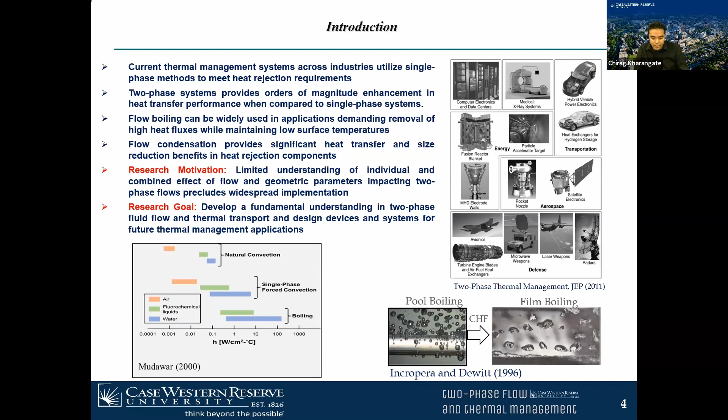So in this talk, I have three basic, main focus areas, which I just talked about in the introduction. I'm going to divide it into flow boiling fundamentals in terms of what fundamental work we're doing in flow boiling. I'm going to start with experimental work, follow that up with theoretical modeling, where I'll focus on one parameter, critical heat flux. And then I'll go into autonomous vision, where I'll focus on, or at least talk about, heat transfer coefficient.

I'm going to follow that up with the flow condensation section, where I'll again talk about experiments, followed by some computational fluid dynamics simulations and data science modeling. In data science modeling, it's more data consolidation and modeling, as well as connection to physics-informed stuff that we plan to do in the future.

Before I conclude the talk, I'll have a short section on different applications of boiling and condensation, just to see the scope to which these fundamental research questions can address actual applications. We work on vapor chambers, we work on electronic devices, say high heat flux device fabrication and different materials. We have applications in NASA. A lot of my projects come from NASA, where we are interested in cryogenic fluid management, condenser systems, heat exchanger systems.

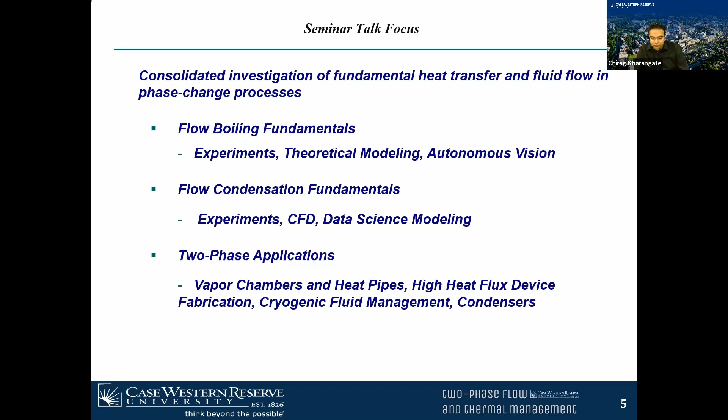In my lab, we work on a lot of questions which come from different industries, as well as the government, including NASA. NASA is a main focus area in my research group, and one thing where we can contribute is understanding the effect of gravity.

In the flow boiling section, as well as in the flow condensation section, in the experimental part, I'll talk about how gravity affects flow boiling behavior. Something we all understand, but what we see terrestrially can be significantly different in microgravity. What we see terrestrially between different orientations can have a significant impact on both heat transfer and critical heat flux. I'll also try to talk about how we can use interfacial instability behavior to predict performance parameters.

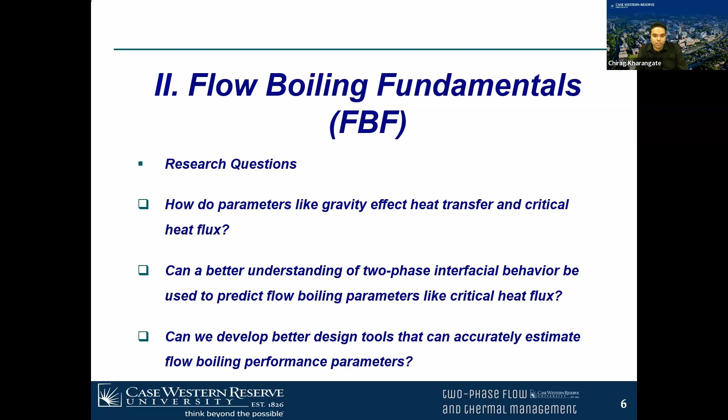As I said, I'll focus on critical heat flux for that section. I'll also go into some work we're doing with autonomous vision in collaboration with UC Irvine, trying to find out how we can better predict, say, heat transfer coefficient.

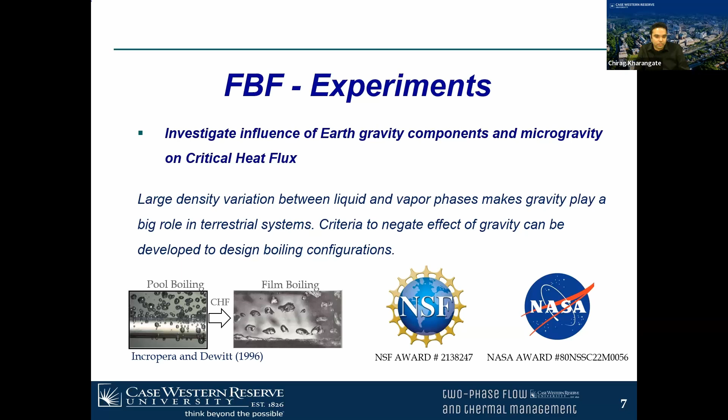With our experiments, I'm going to focus on the influence of Earth's gravity on critical heat flux. I won't go into heat transfer results here, but we do have them, and I can always share those with you if you were to email me.

So we have this flow conditioning loop in our lab. This is supported right now by NASA as well as an Office of Naval Research project. It's a simple two-phase flow conditioning loop that uses NPFH or FC72 as the working fluid.

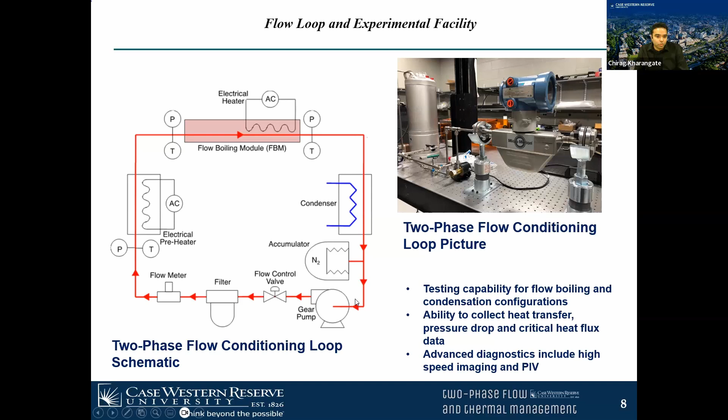It has common components like the gear pump, flow meter, and preheater to provide the required inlet subcooling for the flow boiling module in this situation. Within the flow boiling module, we have two-phase flow basically being generated, and then there's a condenser. It's able to support not only our boiling experiments, as I'll show, but also our condensation experiments.

Our flow boiling module, this one specifically, is designed for capturing flow visualization data in addition to data acquisition for heat transfer and pressure drop. This is showing you, in the figure on top, a sandwiched configuration with two aluminum support plates compressing three layers of transparent plastic between them.

The end result is this cross section, which gives us a flow channel 2.5 millimeters wide by 5 millimeters in height. We have enough length for flow development, and then in the heated section, we have the capability to heat the top and bottom walls individually or simultaneously to provide heating and initiate boiling. The side walls, as I said, are transparent, allowing us to visualize the flow.

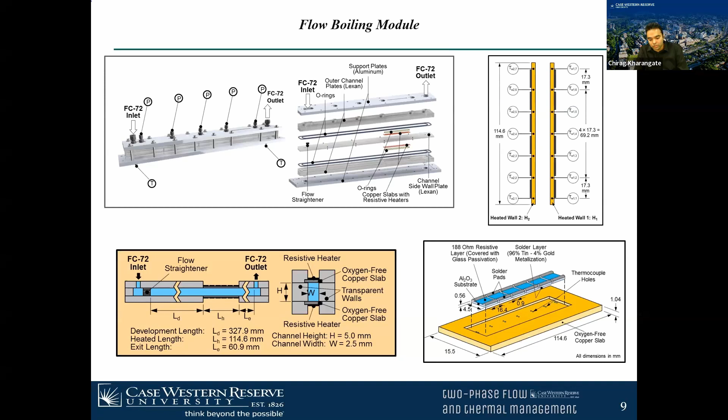We have temperature measurements as well as resistors placed in such a way that we can provide almost uniform heat flux along this heater channel.

I'd like to go into some of this simple configuration data as I show my experimental work, comparing a horizontal flow configuration situation where we have three different types of heating for the same setup that I just showed you.

If we have a top-only wall heating configuration, this is all in Earth's gravity, you would have vapor accumulating at the wall. If you have a bottom wall heating configuration, with the flow and the waviness it generates, vapor leaves the bottom wall, allowing liquid to come back and wet the wall. In a double-sided configuration, if we simultaneously heat both walls, you get more of a combined behavior. This is expected, at least for lower flow rates where inertia is not dominant and gravity is.

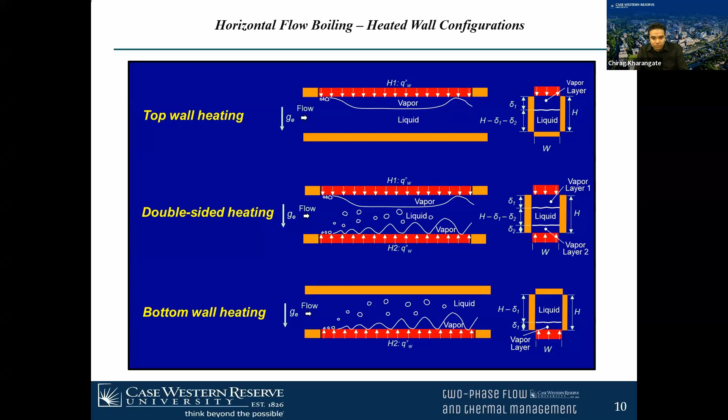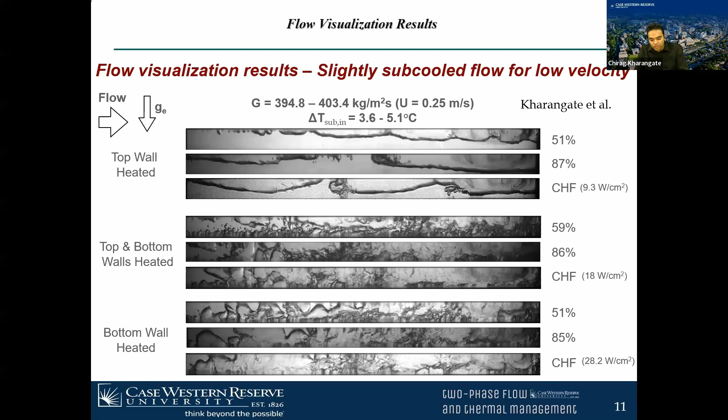So now if we just move to a higher velocity, these velocities are important to us in some of the work that we do with NASA, because if we were to get configurations where inertia starts to dominate gravity, a system that works at 1g, like top wall heating, would also work well in 0g, at least as a starting point. That's how we design some of our experiments for these space systems.

In this situation, we have 4 times the velocity, almost 1 meter per second compared to the last one. And now the behavior is, as you can see, closer. Inertia is starting to become dominant. It's not exactly the same yet, but much closer than what we saw in the last configuration.

And in the double-sided heating wall configuration, it's more like larger shear, larger mixing. But overall, even the critical heat flux values are starting to converge. So these are some things that we use to study the behavior, look at how the interfaces and the phases are behaving as we perform these different heat transfer experiments.

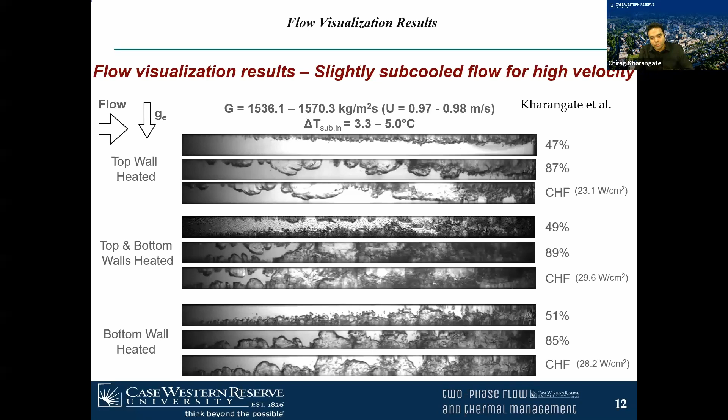So as we come close to the end of this section, I just want to say we perform these experiments for different inlet conditions, which can include high subcooling, low subcooling, and even two-phase inlet. In all of them, at some point, we can see critical heat flux values for all these configurations starting to converge. More or less, the point at which inertia starts to dominate is significantly impacted by what the inlet condition was.

But we are able to design systems where gravity no longer affects this important design parameter. More or less, these threshold velocities help us to design thermal systems for 0G as a first starting point.

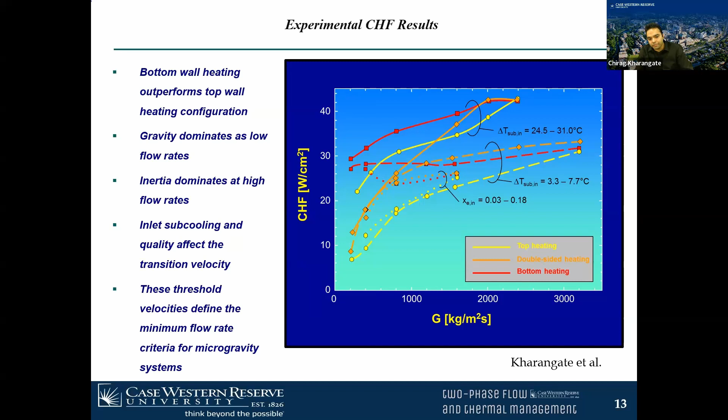So now I'll move, I have multiple sections, all of them related, but go into different aspects of it. Now I'm going to talk about modeling critical heat flux, basically a hydrodynamic instability model to predict critical heat flux. And we'll use the same behavior that we saw in our last slide.

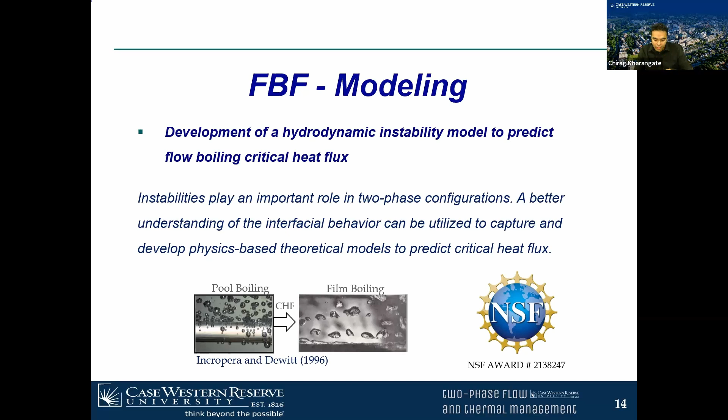For most cases, this was the behavior we saw. There was a vapor contact region, where we would expect mostly vapor being in touch with the wall, with intermediate sections where liquid would be wetting. So this is where most of our liquid access is coming in to prevent a phenomena like critical heat flux, basically due to departure from nucleate boiling, from happening.

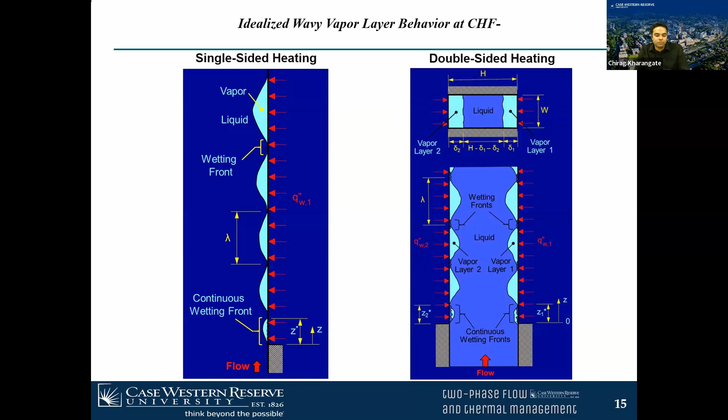So looking at that behavior from the images, we set up a combination of separated flow and interfacial instability. But like I said, what we do see in our imaging, when we see CHF, when we turn systems off, there is very little liquid access that we see at the wall.

So if this were to be a simple wall, before critical heat flux, there is wetting at the wall, and it can include vapor bubbles, but still liquid clearly being seen at the wall. After critical heat flux, we are saying that the liquid no longer hits the wall.

So this specific model that I'm going to talk about states that the CHF is triggered when liquid no longer has access to the wall, and liquid can have access in two directions. One direction is basically in the flow direction, so as new liquid comes in, it will have access to reach the wall. And if that access is cut, the liquid won't reach it.

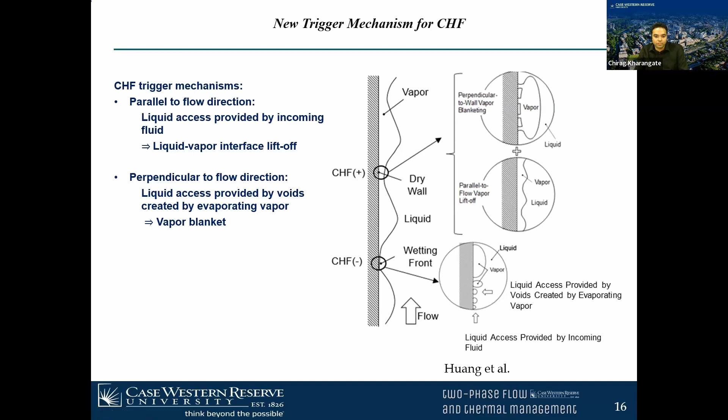And then in the perpendicular to the flow direction, again, as vapor bubbles are generated, the liquid re-wets the wall. As vapor comes out, it comes back to the wall, and that is another access point. So CHF, according to the model, is triggered when both these accesses are cut.

So the first part of it, we do instability analysis. Let's just consider a simple configuration, liquid moving along the wall. We do an instability analysis with mass, momentum, and energy with slip flow formulation and assumptions. More or less, we are interested only in the mean velocities and mean vapor thickness in this situation. We do the analysis to find out the variation of different layers, as well as the liquid layer, the vapor layer, the velocity, and the pressure drop along the channel.

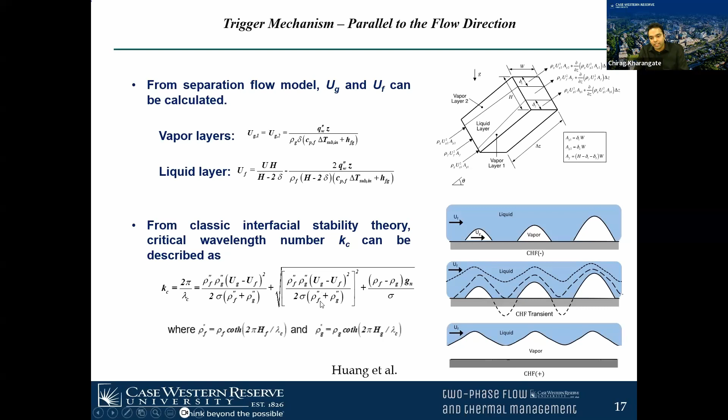In the first part of the instability study, we talk about the flow direction. So in the flow direction, we have these vapor bubbles being generated, having a wavy vapor behavior. As long as this interface is unstable, it's going to touch the wall, because unstable would mean it will always try to have access to the wall. When it becomes stable, which would mean it tries to flatten out, that's when in this flow direction the CHF would occur. So the transition from instability to stability gives us, from a classic interfacial instability theory, the wavelength at which that will happen.

And that is the first number that we get out from this part of the model. Now we combine that with what is happening in the wetting front in the other direction. As we saw those images, within the wetting front, it's mostly liquid on top of these vapor bubbles which are generated at the wall. So within that, if we consider a moving frame of reference with the vapor not having significant shear force on the liquid domain, we can model it similar to our Zuber instability study, where CHF is triggered when these bubbles generated at the wall merge and generate a vapor blanket. So we use, within that frame of reference, which is the wetting front in the perpendicular direction, the Zuber pool boiling model to get the value for critical heat flux.

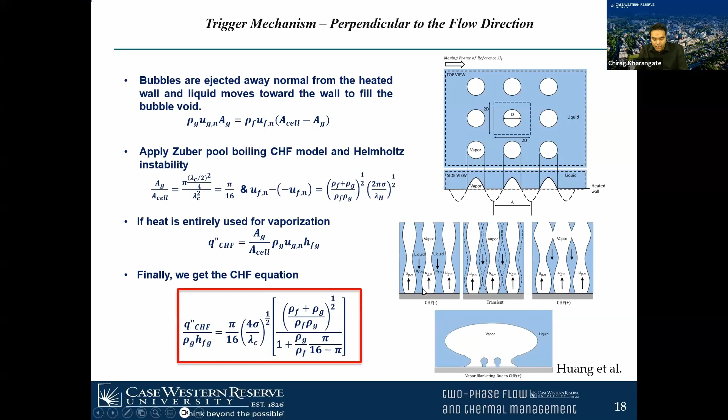So combining both these wavelengths within this section, we are able to predict CHF, which we compared for different experiments that we performed. This included experiments in horizontal flow, the ones that I just showed you, with double-sided heating, bottom heating, top heating, for vertical upflow conditions, as well as in microgravity conditions. Overall, the prediction capability of these models is within about 15%, which is significantly better than any traditional, just correlation-based technique in such configurations.

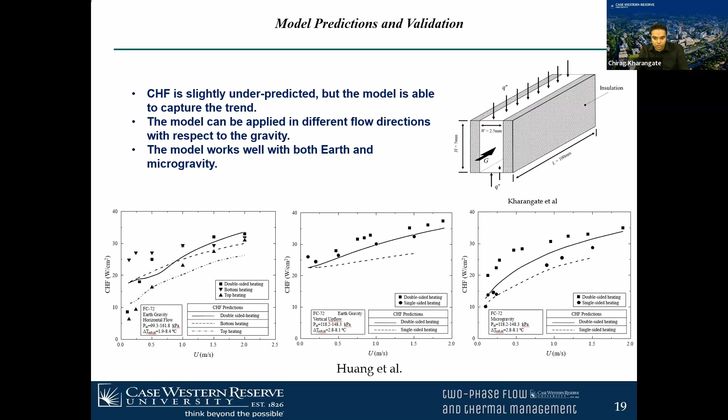So with that, I'm going to now move to another section. This talked about modeling CHF theoretically. Now let's talk about something new that we've been doing for the last couple of years. I'll go into utilizing data from, say, machine learning.

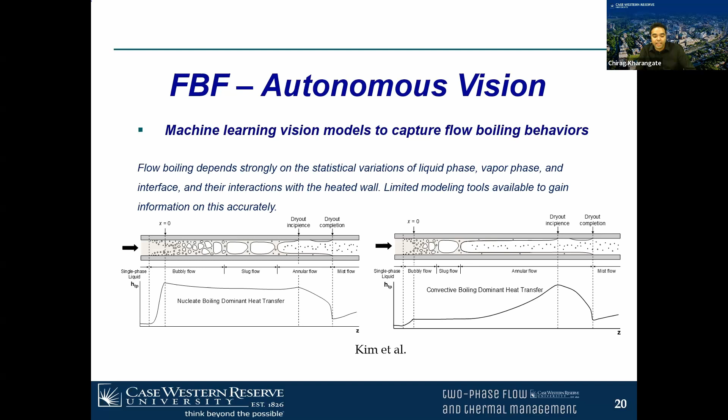Here, the flow boiling part talks about autonomous vision. We are able to capture more information from autonomous vision tools compared to our traditional techniques, and how we can use them is what this section will talk about. But we do know that just comparing different boiling behaviors, you could have a behavior that's nucleate boiling versus convective boiling, just if you were to change, say, the dimensions of the channel or the fluid type. And these things significantly impact designing universal tools for our performance parameters. So here, investigating and studying the specific flow behavior may and can help us, we think, in improving our design tools.

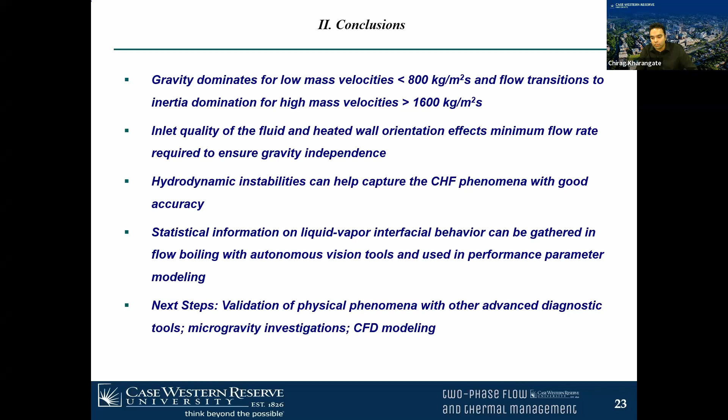Went quickly into vision data, where instead of using any manual techniques to understand the images, we used autonomous vision to extract information from the images and then use it to improve or understand our predicting capabilities for heat transfer. There's a lot of other work that we do, and there are next steps in some of the work I showed, which includes more diagnostic techniques and using that result in modeling and CFD modeling, which I'm not going into today, but it's part of the work we do relating to fundamentals in flow boiling.

I'm going to move to the second section, and these sections I'm going to go through more quickly than boiling - I do try to stay longer on the boiling section. In condensation, again, I'm going to talk about how gravity affects the behavior.

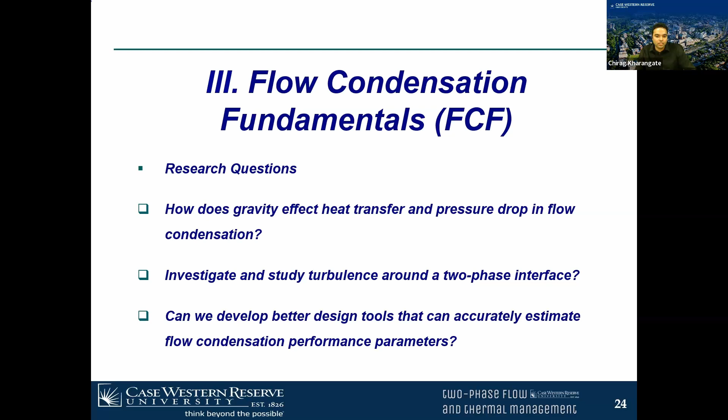We do understand how important it is, but for us in the lab it relates a lot to NASA and the needs of NASA. So another thing we want to improve in condensation is the same thing: performance parameters. Our understanding of two-phase behavior and interfacial behavior, and turbulence around the interface, can significantly change the heat transfer. That's something we want to study - experimentally get data, as well as capture it using computational tools if possible. I'll conclude this section with a small data science, basically data modeling aspect, which we apply to condensation. So with experiments, our importance and focus is capturing the interfacial behavior.

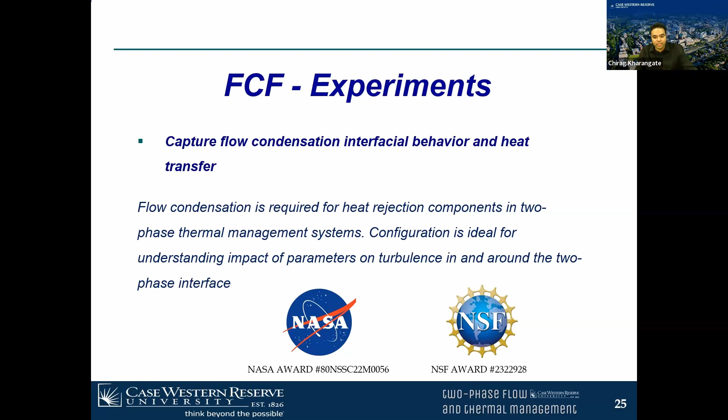Condensers play a significantly important role in heat rejection systems across applications - anyway you have a boiling system, you need a condenser for heat rejection. This is the same experimental facility I showed you; the only thing updated here is the condensation module. We have the same system, able to provide enough heat to completely convert this to vapor or give a two-phase inlet to our test section. We have a tube-in-tube condenser configuration with the inner tube having the working fluid, FC72. It's a counter-flow heat exchanger, and the outer tube has water.

Wall temperature measurements, as well as the water temperature measurements, allow us the capability to estimate the heat flux and the corresponding heat transfer coefficient.

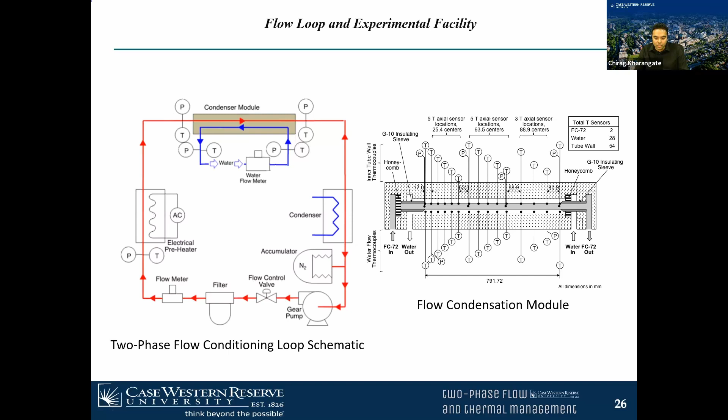We've performed a lot of experiments on different projects with respect to what happens to the interface. The behavior in condensation, to study it, is more complex and is highly more turbulent, I would say, compared to what we see in boiling.

But basically, we do capture strong interfacial waves moving along the channel, and our channel configuration also impacts how well we can visualize it. Like a curved surface, etc., has more curvature effects that we are not able to remove when we get them to images. But we study terrestrial horizontal data where we can see how gravity would affect differently on the top side versus the bottom side.

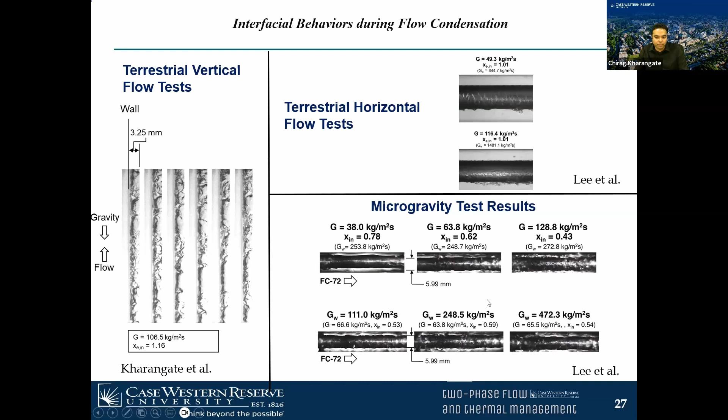Microgravity data, this is not very high quality, but we have more axisymmetric behavior, and we study them for different flow rates, different conditions to capture the interfacial behavior.

One important part of what we want to study, at least in my lab, we are trying to understand, and this is part of not only this experimental study but also the computational study, is how much the interface affects the turbulent behavior.

So if this is a condensing wall, you have liquid followed by vapor. This is the liquid film in this film condensation scenario.

If the interface has no impact on the turbulence, then we would expect basically the eddy diffusivity to have this no slope at the interface. We know that the eddy diffusivity dampens at the wall.

So one theory, or there are some theories which state that the eddy diffusivity also can dampen at the interface. Different levels of dampening can lead to different behaviors around this interface. And for no dampening, you can get a temperature which is much higher than with very high dampening.

So how much this moving interface impacts the turbulence behavior can significantly change what is the final temperature or the heat transfer coefficient in condensation. Experimentally, we measure it, and computationally, we try to estimate it. I'm not going to go into the results in this section, but this is one important aspect of condensation that we are trying to investigate in the lab.

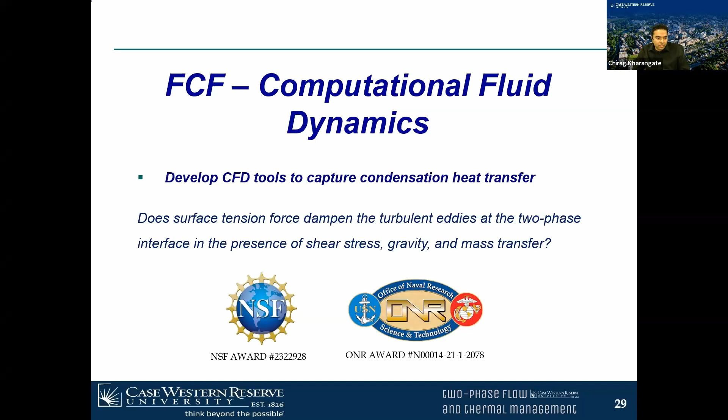With respect to CFD, here I'm going to show you initial data that we got with 2D CFD modeling of the same configuration. We used the data from a vertical upflow configuration.

So we try to tune them in some of our future studies. It is dampened here, but this rate of dampening we are able to modify and study. If we dampen it more on one side versus the other, we are able to better tune these results. But it's not a consistent thing or one number for all configurations.

So our understanding of this needs to improve, something we plan to get out from experiments. But the models themselves also capture this interfacial dampening. The film thicknesses are different at different locations. That's why they are not very clean to visualize.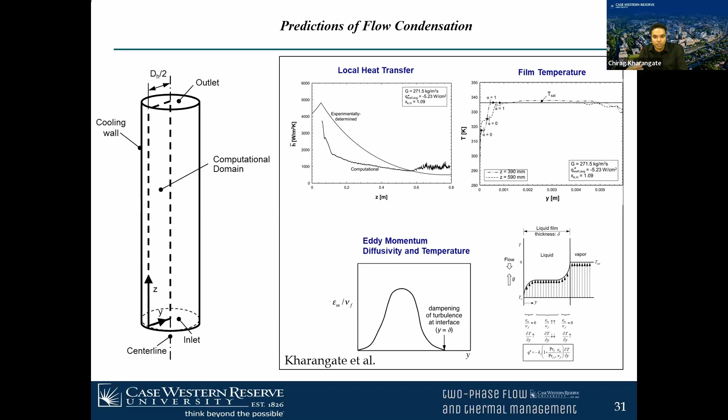But still, we look at what we capture using computation, compare it to our experiments with respect to our parameters of interest here, which would be heat transfer and pressure drop. Fluent itself also can capture at least the complex interfacial behavior. There is no, I would say, quantitative comparison that we can get with these images, but at least something to start off to see if our behavior, which we see in experiments, is observed in the CFD.

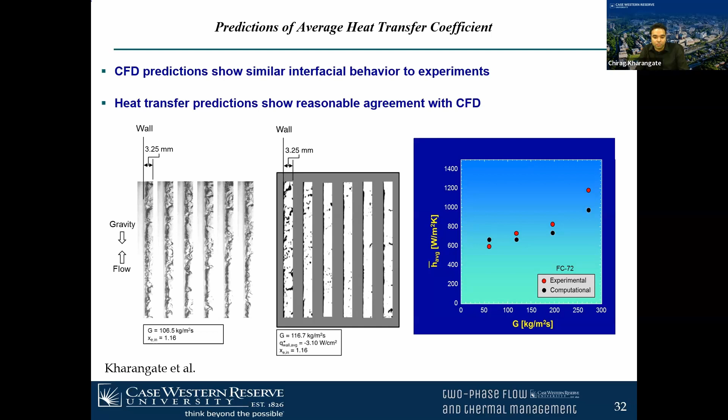The local average predictions of heat transfer are reasonable, but as you saw, the mean or the average behavior is reasonable, while the local is not. And that's where significant improvements are needed in our CFD, as well as our understanding of these models to predict or improve our predicting capability.

I'm going to talk about another section now. This again relates to data science, but here I'm going to go into what we do with data consolidation. In the first section, we used autonomous vision to extract new information using vision tools.

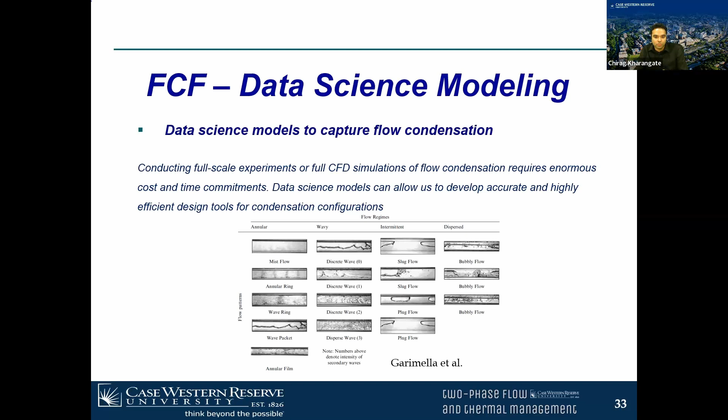For condensation, we've done this for boiling as well, but here we went another way: let's look at all the data that's available. Instead of generating a correlation, we can develop a machine learning model. We gathered all published data available when this paper was published, around 37 published sources for flow condensation, picking up heat transfer coefficient data of close to 4,900 points, including up to 15 working fluids, a large range of reduced pressures and different conditions.

We investigated them using correlation maps. We also looked at features and studied how the data is spread. For example, R134A is a very dominant fluid in most of our studies, and horizontal is a very common configuration across most studies. We look at these so that when we make judgments on model behavior, we can go back and link some of the reasons for why they do well or do not.

Using simple training data, the models themselves can predict better than correlations. Even if we were to modify traditional correlations like Kim and Mudawar, they cannot really match the 10% errors that we can get with most of the advanced models, which would include neural networks or gradient boosting models.

One thing we wanted to see is, do they generalize? That's where the main thing is seen. If we were to remove data from fluids like R134A, the models are still able to capture the local trend - the complete database is removed from training, and the neural network model is able to capture the trend as well as the data itself in most cases. This is because this fluid has significant enough data elsewhere in the training database that it's not going to make a significant mistake.

However, if we do this for a fluid with less data, maybe only 1, 2, or 3 databases, our correlations still do better, because if the fluid doesn't have enough parametric variation represented, the models don't do well. This is where we are implementing things like theoretical model predictions, which I'll talk about briefly, to bring these closer to accurate. But at least the initial results from these data models showed us these trends, and we were able to improve our design tools in such situations.

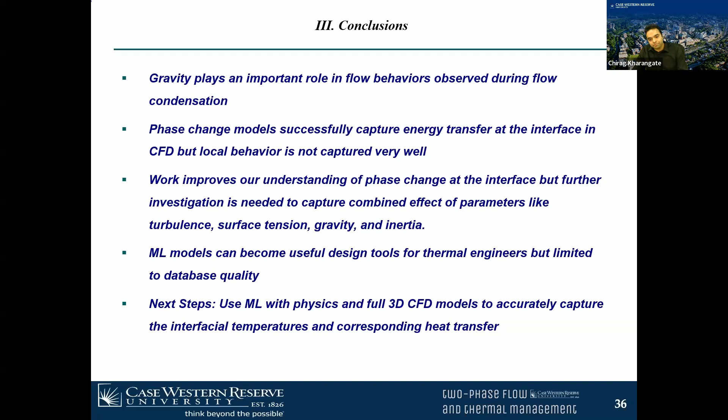So the next section, which I'll go over quickly, covers many of the fundamental questions we're trying to address in boiling, for flow boiling as well as flow condensation. There are many applications where boiling and condensation play a significant role. One of them is work we're currently doing with Advanced Cooling Technologies, a NASA project where we are trying to design heat pipes for space applications.

This is a variable conductance heat pipe system, which has a non-condensable gas (NCG). These are very useful in space because the pressure in the system or the heating level can change the pressure and the amount of NCG region contact, making them actively respond to the heating power. So during cold nights on the moon, you don't want the system to operate - you can turn it off, but you need low power to keep your electronics at a safe temperature.

However, when we tried to do microgravity tests with this, it basically failed, because if you turn the system off, diffusion would cause all the vapor, liquid working fluid, and NCG to mix - just normal phase diffusion, not just thermal diffusion.

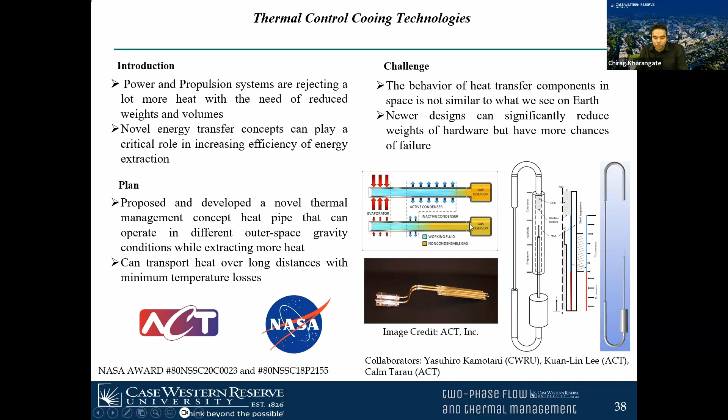There is work that we are doing with cryogenic fluid management for NASA. NASA is planning these fuel depots in space, and the plan is to basically take spacecrafts, collect fuel around a fuel depot near the moon, and then take them to Mars.

One big challenge is the temperatures at which these fuel depots, as well as the transfer lines between the fuel depots or between the spacecraft and the fuel depots, would be. Their temperatures are much higher than the saturation temperature of the fluid, which leads to a lot of boiling behavior and even condensation in some situations.

So we are designing an experiment for the International Space Station to study how microgravity would affect the transfer line process. In this specific example, we try to understand as the liquid comes in and boils, the transfer line process would start in the film boiling domain, go through transition boiling, nucleate boiling, and then single phase. This is when the chill-down process basically completes.

Understanding this to reduce the amount of vapor being generated is one aspect of it. Being able to predict this is also important, because as it boils, you're going to increase and pressurize the system, and you do not want that. The only way to save the system when it significantly pressurizes is venting, and venting means losing cryogens, which is what we don't want, to lose cryogen just because we were transferring it.

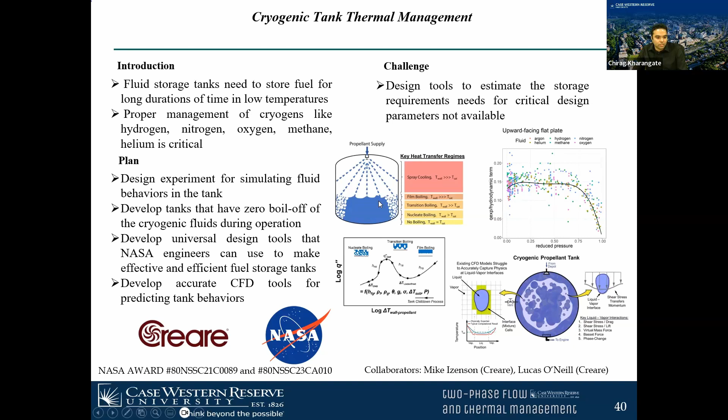Some other aspects of the work include device development. This includes heat exchangers using materials like silicon nitride. We're doing tape lamination techniques to develop these manifold microchannels at small scales, and other additive manufacturing techniques to make heat exchanger systems as well as embedded electronic systems with silicon nitride. This is through the Office of Naval Research.

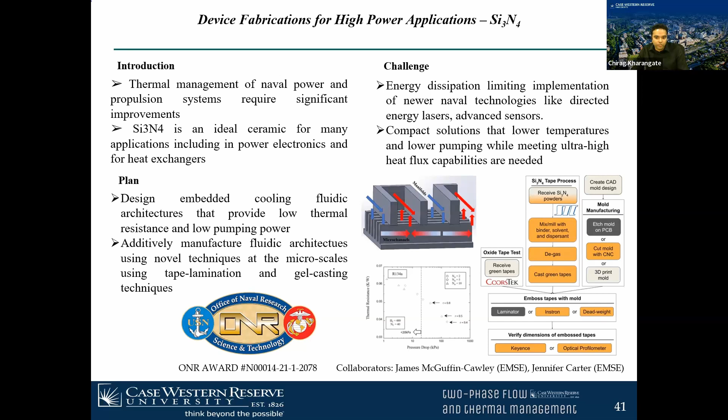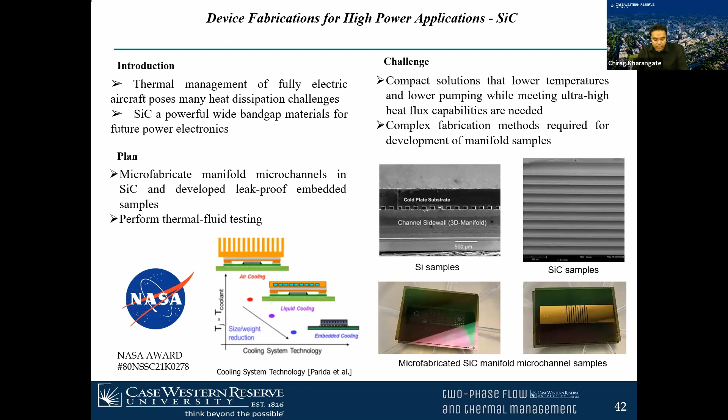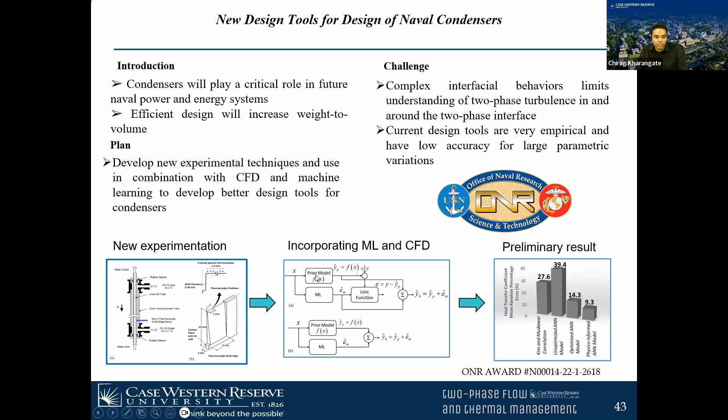That specific project also addresses the fundamental aspect of interfacial temperature behavior. We are doing experiments to capture how the interface affects turbulence and temperature behavior around it, and then develop new models as well. But just to give you an example, machine learning can also improve with theoretical tools, but we need to see how applicable they are to a specific situation.

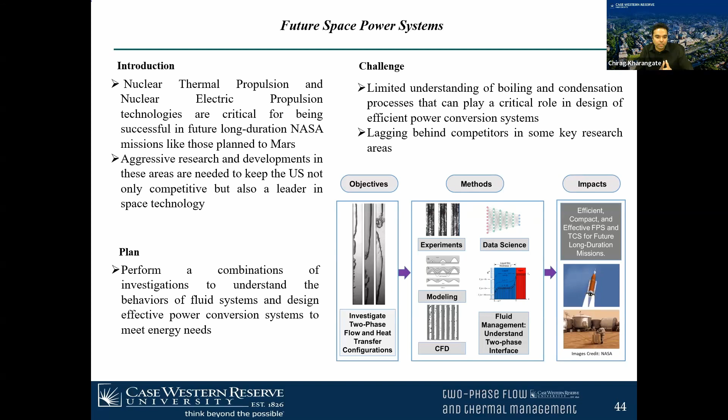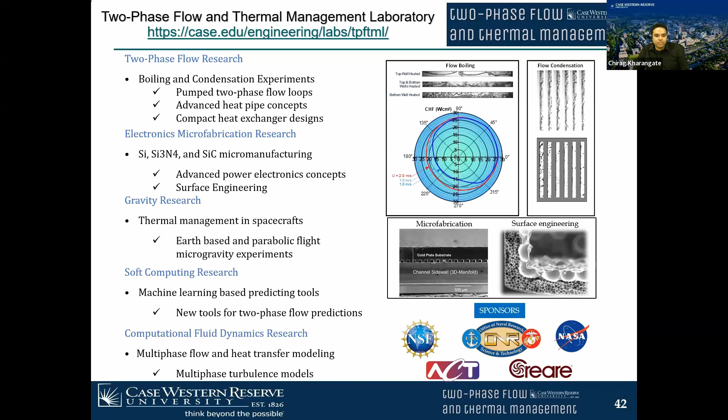So I talked about, through all these sections, all aspects of research in boiling and condensation, and touched upon each of them in some detail. I know I didn't go into very specific detail on some of them, but I wanted to give you a good overview. I did touch upon everything, and I think we're on good time.

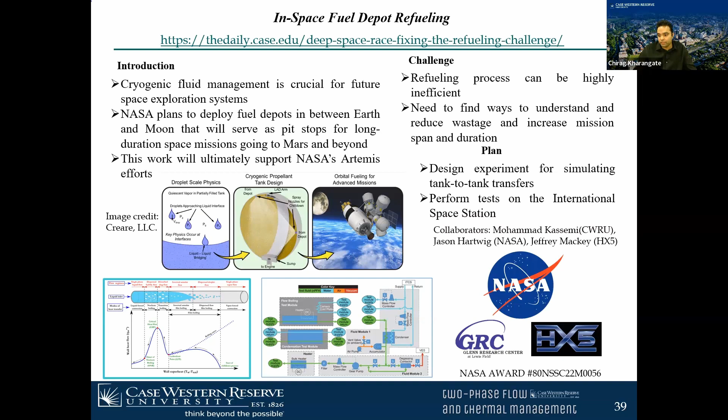It's something very new and we're trying it. I don't have results for it now. Okay, thank you.

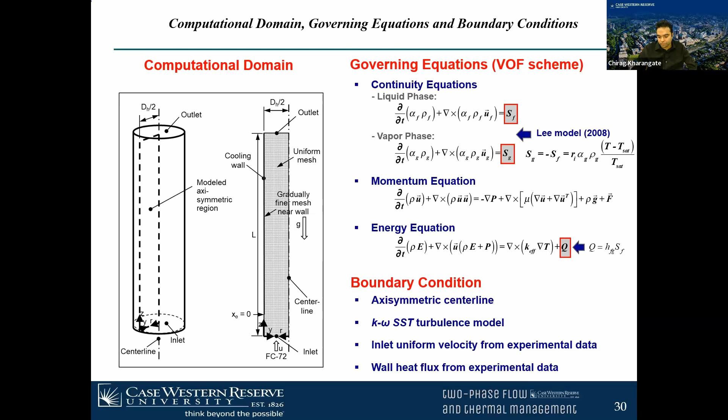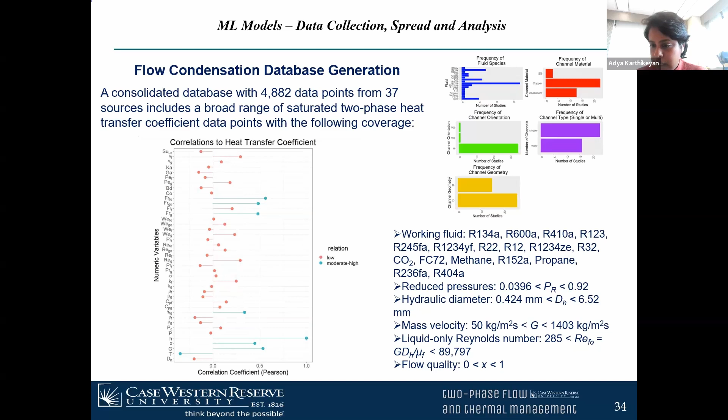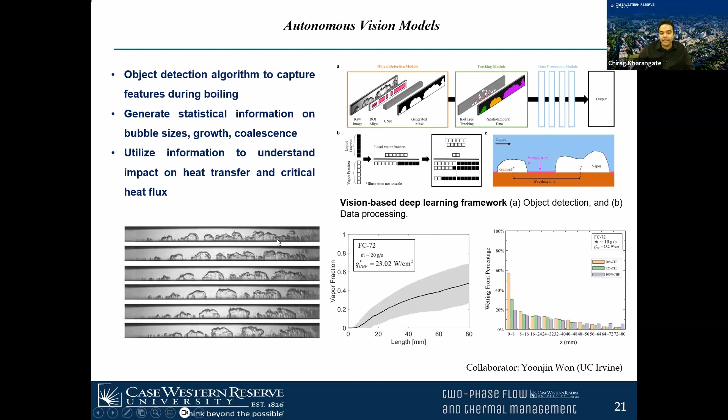These images are not showing it directly. So we just use the correlations with the average variation behavior of the wetting fronts and the vapor waves to predict heat transfer using traditional techniques. At this point, we are not really capturing everything exactly. There's some higher error also in the inlet and outlet data that we get from machine learning.

But this can now be taken to the step where we use specific microlayer models and target them to see which microlayer model gives better boiling behavior within this region. With the traditional ones, we could not do that at all, because the trends were not captured and the behavior also did not match. So our next step would be to target specific mechanistic models for heat transfer and improve it. But at least we went one step further just using this vision data.

I think that was a very good move. I was very happy that this can be taken further.

No, absolutely. I was curious if this can be done on a dynamic scale, like continuously capturing this data of where the vapor is forming and where the liquid is wetting.

This is going to give exactly that. Here we are also showing averaged behavior, but we have all the statistical information. We use time averaging, how much time it's wetted versus dry, to find the correlation. If I were to just use a distance, it doesn't work. How much time it has vapor versus liquid really is more accurate, and it did work out better.